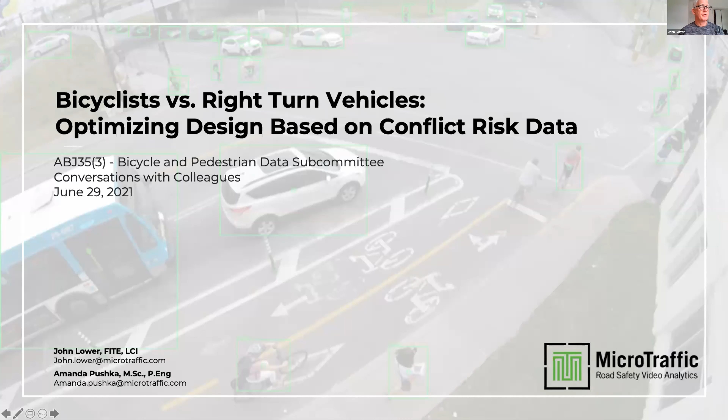We've got an exciting effort just underway, and it's a good time for professionals such as the 29 we've got on this call to help influence the design so that it's most useful for ongoing research. So I'm going to take just a few minutes to tee this up and talk about the method for conflict measurement, and then turn it over to Amanda, who will roll through the cyclist right hook design study, and we'll get into the majority of the time then facilitated discussion, so you guys can help us influence a product that will be useful to any researchers that we've got today. So we'll move on to the next slide.

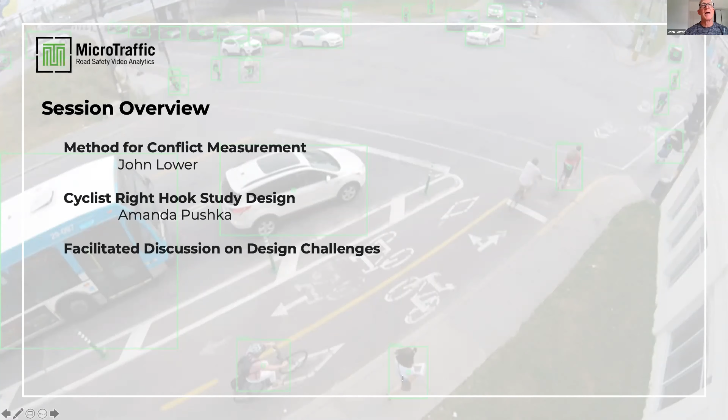Method for conflict measurement. Go ahead to the next slide. What's new? What's new is proactive traffic analysis, where we can measure near misses and proactively and precisely diagnose risks, 5 measures of risk, to empower effective road safety improvement planning. So this is used most often to supplement the historic approach of looking back at 3 to 5 years of traffic crashes and trying to identify patterns and solve for the issues that were shown from those patterns that were in place 3 to 5 years ago.

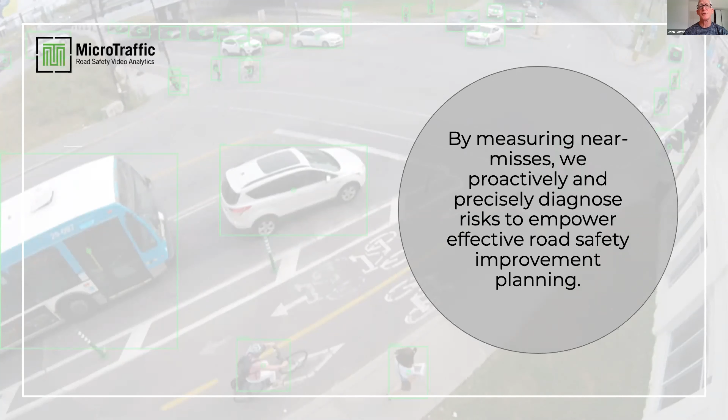Why not collect real-time count data and have the ability to measure just how close was that, and through analysis of kinetic energy transfer, determine just how severe that near miss would have been. And then that will inform the selection of the most effective countermeasures. We can clean up those safety concerns before the crashes occur. So on to the next slide.

Our process has 6 steps, starting with the collection of video at the intersection. To capture that operation, 3 days is typically what we're after. And we then input that video to our algorithms, where our artificial intelligence has been trained to identify every user of the street. We can even differentiate between bicyclists and e-scooters at a very high level of reliability. So with that, we move on to the second of our 6 steps, and that is our AI tracking. Frame by frame, we're identifying the route used by every user of the street.

The third step is monocular spatial translation. I'll define that for you. It's looking at the pixels and translating the pixels from the video into ground plane measurement. And with that, we have the ability to measure precise distances and calculate precise speeds of every user of the street. With that speed and distance data, we're able to move on to step 4, which is to map the trajectories of every trip made on the roadway. And that moves us into the real meat of our service. And that is step 5, identifying near misses by level of severity.

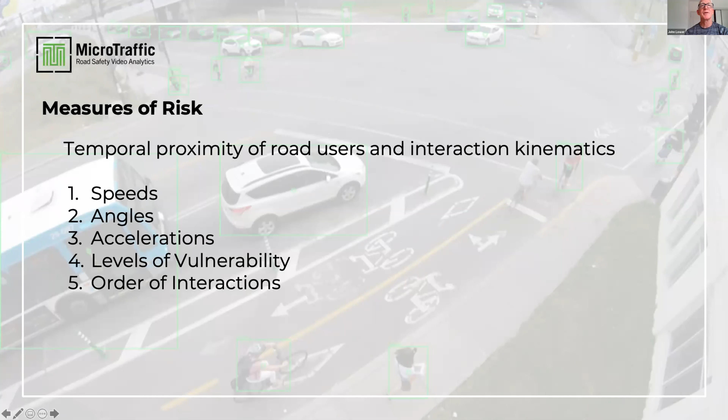Okay, thanks a lot, John. So now I'd like to introduce this cyclist right hook study that we're launching using this conflict data.

So just to set up the motivation for this study, protected bike lane mileage in North America has grown by more than 600% since 2011, and that's a couple of years old, that stat. So that number is going to be even larger. So it really demonstrates this demand that we're seeing for cyclist infrastructure. And especially in COVID, we've seen cyclist level increases both in Canada and the United States. And so we're really seeing the importance of developing safe and evidence-based design guidance for these facilities.

Between 2014 and 2016, 44% of bicyclist fatalities in urban areas were occurring at intersections. So this helps us narrow in our focus onto intersection areas. And of these facilities, right turn versus bicyclists in the same direction were listed in the top 7 most common crash types in the US. And some of the more recent data may indicate that it's even higher than that top 7, maybe in the top 3 or top 5. And so this focused us in on this right hook conflict issue.

And I'll show an example of what that looks like in this video clip here. So you can see the cyclist traveling through the intersection and the vehicle making that right turn across their path. In this case here, it was a relatively low severity interaction. The cyclist proceeded through with a minimal level of risk, but these are the types of events we want to study and look at different intersection types to really try to understand the risk effects on cyclists.

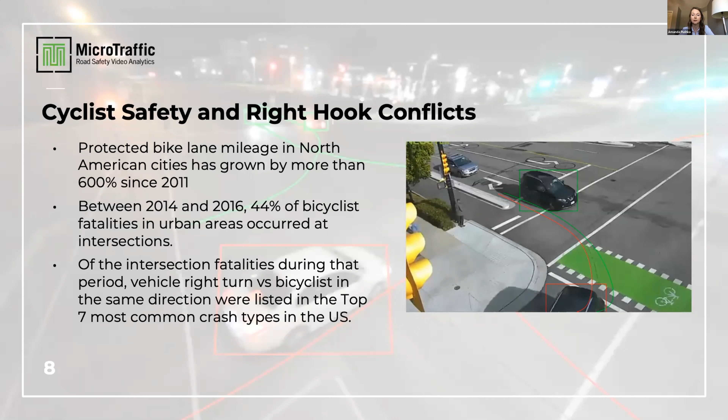So regarding all this focus on intersection risk and the right hook issue, there's been a number of recent research published to focus on this. So first off was the NACTO Don't Give Up at the Intersection Guide in 2019, that's often referenced. And most recently, this past fall, was the NCHRP 926 Guidance to Improve Pedestrian and Bicyclist Safety at Intersections. And so these guides provide a lot of great possible countermeasures to address the right hook risk conflicts, but the quantitative safety effects of these design alternatives for the right hook problem are not really well known. And so we've received a lot of feedback from agencies that are still struggling with this conflict issue and acknowledging that it's an important topic that's lacking concrete design guidance, helping them to select which treatment to use where.

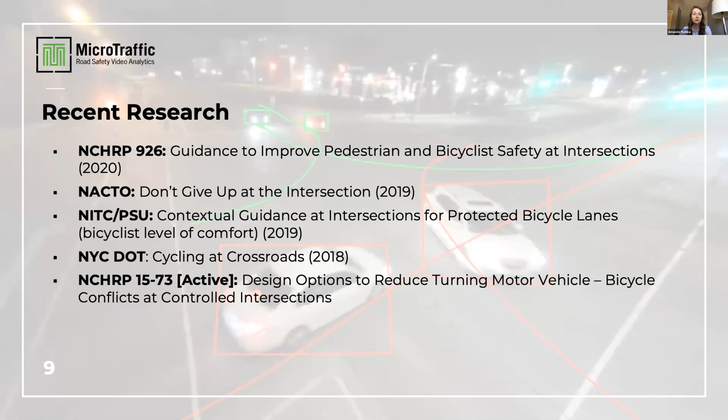And so with that in mind, we started a preliminary study on this in the city of Vancouver this past winter. And we looked at 22 different locations in Vancouver. And the city was really interested in studying the frequency and severity of cyclist right hook conflicts across a variety of different site types. And a few of them are shown in that slide there. And so we looked at different unidirectional, bidirectional protected facilities. We looked at painted bike facilities. We looked at different types of signalization, whether there's a protected vehicle right turn or protected permissive, or maybe it was just permissive only. We looked at different cross-sectional geometry.

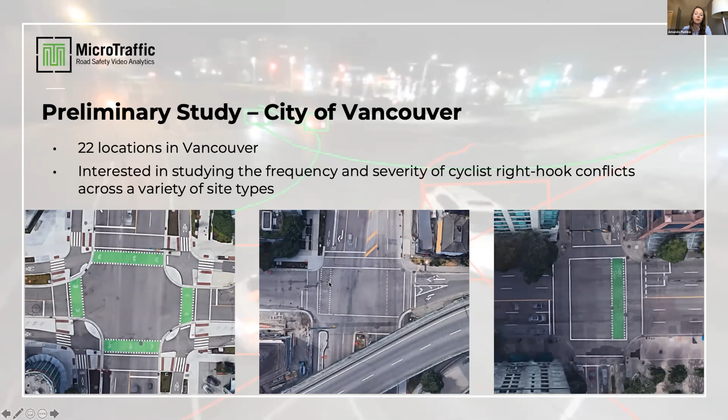So on the left-hand side image there, you can see more of a protected intersection style. And then in the middle, maybe you have to look a bit closely there, but you can see that in Canada, we can have a cycling facility to the right of a right turn lane. So we can still get this right hook conflict happening with a right turn bay. So we wanted to understand some of these differences in Vancouver with their infrastructure that they had.

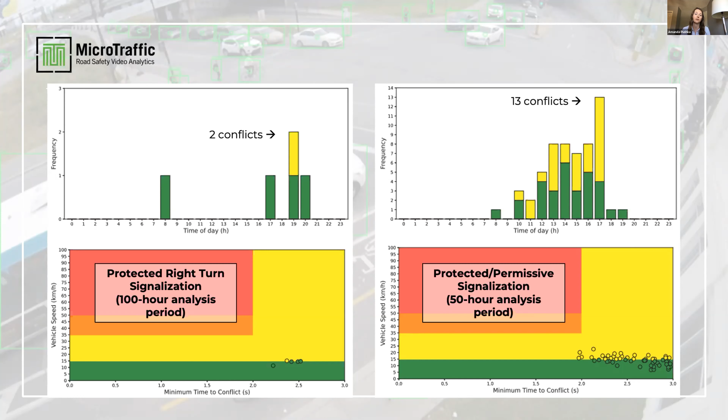So we started to see some trends in terms of the value potentially of protected right turn phasing, but we realized we wanted a larger data set and to really start to quantify these effects and the right hook cyclist risk. So this really led us to this study that we're talking about today, this right hook study. So we've expanded from those 22 locations in Vancouver to approximately 200 locations all across North America.

And you can see those pins on the map there. The blue pins are participating cities and the purple pins are potential participants that are still working through some of the logistics. But in general, we've met our 200 site location goal, and always happy to include if anyone else wants to join in. But from this, we've expanded to the potential to collect at 200 sites.

We've established a technical steering committee to really help guide this study. It's made up of a lot of different practitioners in cities and DOTs, research collaborators.

I see Krista's on the call here. Always happy to have you involved, Krista.

And developed this technical steering committee to really help us shape into something that does become a best practice design guideline that can be used across North America. And so currently we're finalizing our site type matrix to address the key items that would be improved with quantitative near miss data. So we're hoping to hear some feedback today about some of the challenges that are faced by practitioners when designing for right hook cyclist infrastructure. So that's our next step.

And then upcoming in the next few months, we'll be collecting 3 to 7 days of video footage at each location and then running conflict analysis as John presented there through our video analytics software. And this will be happening this summer here. And so upcoming into the next year to do work on our other outputs.

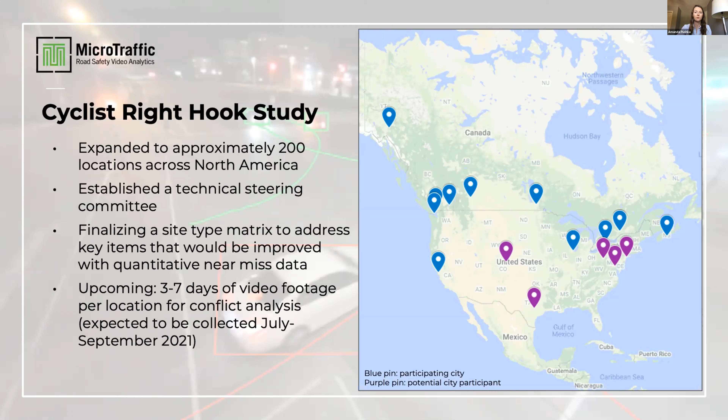So to provide a quick overview of our study site type matrix, on the left-hand side, we want to look at a few different cycling facility types. So you can see that there's a protected one-way bike lane, a protected two-way bike lane, painted bike lanes, unprotected, and multi-use paths. We want to look at different types of lane designation. So is there added risk by having a right turn lane, a right turn bay right next to a cycling facility, or is that okay?

We know that there's MUTCD restrictions in the States for this, but curious to see what the data is actually saying about that. And we want to look at different signalization types. So whether that's a leading bike interval, does that help reduce risk or reduce the severity of that potential interaction? Looking at protected only right turn vehicle signalization. So starting to understand some of these differences in site types.

And in addition to this matrix, we're going to be collecting a large amount of attribute data at each location. And this will help us to gain additional insights about the impacts of various design components, such as the lateral offset, whether right turn on red was restricted or not, the type of protection that's there, so what kind of buffer are we seeing? Is it just a curb or a flexible delineator post? The approach grade for the cyclist. So a lot of different intricacies that we want to try to massage out by looking at data. So this attribute data will be collected as we move through this study.

And so some of the expected outcomes of this work is first and foremost, we really just want to increase the knowledge of road safety issues that are related to cyclist safety in North America, especially for this right hook configuration that is so prominent in our bicyclist fatalities in the past decade. So the key is just to gain that data that is lacking and allow us to improve our understanding of the issues.

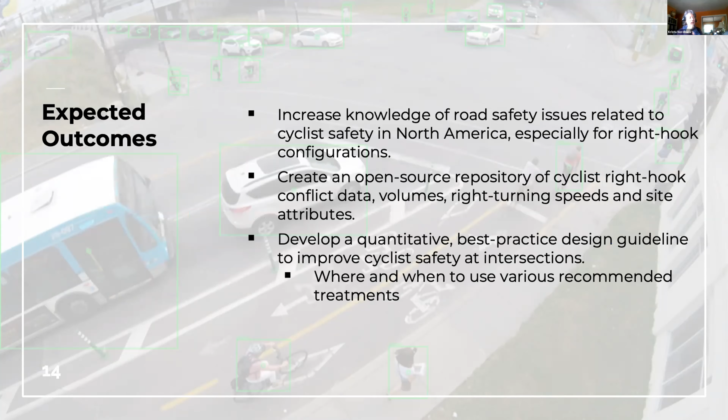And I'm going to put Krista on the spot. Since you're involved with this, Krista, would you like to make some remarks about your role in the project and what you've been doing? Well, can we go back to the slide, Amanda, with the matrix you had there? Because I think that gets to some of the answers there.

So we have protected one-directional bike lane, protected bi-directional bike lane, and painted bike lane unprotected. So this one, the painted bike lane unprotected, would be one where it might be possible for the cyclist to get into the main lane to avoid the conflict. So there we can actually study what Jim was referring to. In some of the other situations, it would be more challenging for the cyclists to do that. Anyway, I just wanted to point out that, as Amanda already said, we're looking at all these different types of infrastructure to answer the question.

In terms of my role, I'm just an advisor, and my interest mainly is in making sure that the data are valid and provided to the community. So that was my question, since I've got the floor, especially in terms of the subcommittee: what data will be made available to researchers, and how will it be made available?

Yeah, good question. So we're trying to organize the logistics of that, but right now the plan is to have all the conflict data made available. So the conflicts and their severity rating, so the associated speed and temporal separation. We'd like to make available the volume counts we get over a 24-hour period in 15-minute bins, and all the attribute data for each site location.

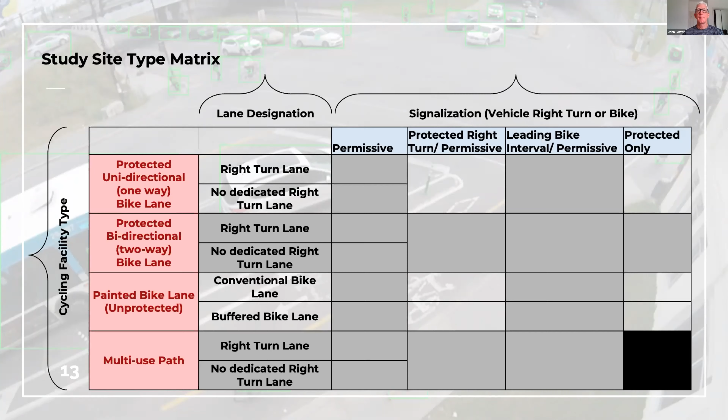I'm skipping forward here, Tony, because I was a little bit interested in hearing back from some of the agencies on the call about some of the challenges and successes of dealing with right hook risks. So have you found that, say, for example, protected intersections are working really well in your local agency? Just curious if there's any thoughts on challenges and successes with cyclist right hook risk.

Yeah, sure. Open that up to anybody who maybe has an anecdote or an instance to share with a local experience. Realizing, of course, we don't have a great deal of truly protected intersections. Yeah, protected intersections or even some sort of different phasing, maybe leading bike interval or bike signals or anything in particular that you've found.

Well, while we keep that question open, Jim's asked another question in terms of what's involved or required for an agency such as the City of San Diego to have some intersections included in this study. How do they become participants? Yeah, great question. We'd love to add you to the list. There is a contribution. It's a pooled fund study. So we have some sponsorship, there's some city participation, and there's video collection.

So the video collection would have to be added from those locations, as well as the video analytics that we do has to be funded as well. So we'd love to connect with you and talk about those options. I'll just flip to this next slide here. There's an email for John and I. If you want to send us an email, we'd be happy to connect and chat. The more sites, the better in our mind for this study. John, do you have anything you want to add to that?

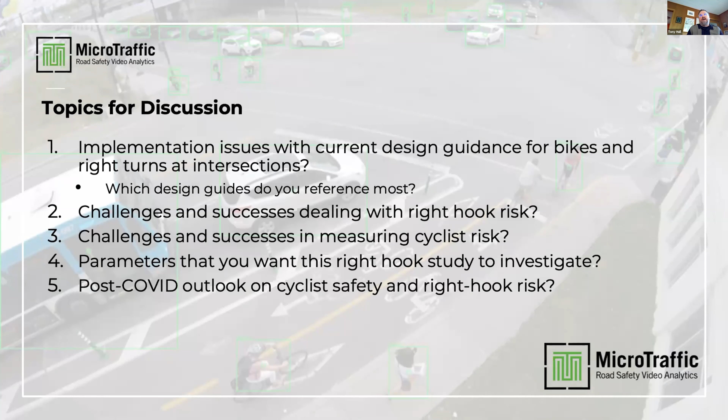And first of all, I really want to thank Amanda and John for sharing. I think this is a really exciting project. I hope that as this gets toward the end, maybe we revisit this conversation. I think everybody's going to want to hear some of these outcomes and understand how this might be useful in their cities.

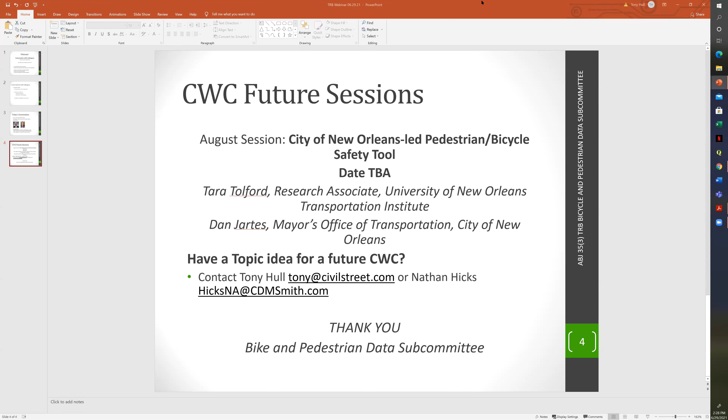Oh, I figured out. You have to stop sharing your screen to leave the meeting. Hey, Greg, give me a call soon when you're back in town. We got to connect now that hopefully we're both vaccinated.